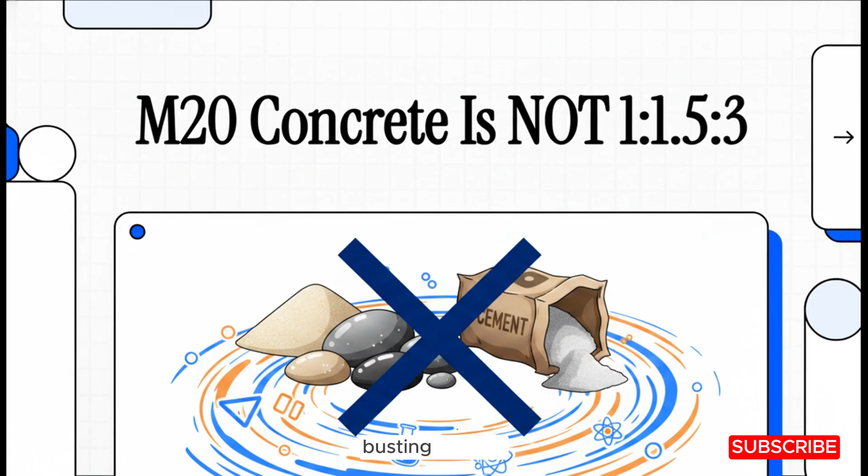Okay, if you've ever stepped foot on a construction site or even just watched a crew working from the sidewalk, you have almost certainly heard of the golden rule for M20 grade concrete. It goes like this: 1 part cement, 1.5 parts sand, 3 parts stone. Super simple, right? Well, you might want to brace yourself because everything you think you know about basic concrete mixing is about to get challenged. Today, we're completely busting the 1 to 1.5 to 3 myth. So, let's dive right into this.

There's this incredibly profound quote from M.S. Shetty. He's basically a legend in concrete technology, and he hits the nail on the head. He says, "It is easy to make concrete. Broken stone, sand, and cement make good concrete. But the same proportion of broken stone, sand, and cement also make bad concrete." It perfectly highlights this wild illusion we all have that concrete is just this foolproof, standardized recipe.

Which naturally leads us to a massive question. I mean, think about it. What exactly makes the difference between the good stuff and the bad stuff? If the physical, dry ingredients in the mixer are literally identical, why does the final product on one site last for a century, while another building crumbles into dust after just a decade? That's the core mystery we're unpacking right now.

And that brings us to Section 1, the myth of simple concrete. For decades, the entire construction industry has leaned heavily on these old-school rules of thumb. People just assumed that mixing by volume alone guaranteed a quality pour. But let's take a closer look at why that idea is fundamentally flawed.

Honestly, it's kind of like baking. These standard volume proportions, what engineers officially call nominal mixes, are basically like using a generic, store-bought box cake recipe. Sure, it'll work if you just want a basic everyday cupcake, but modern civil engineering, that requires molecular gastronomy. Simple volume batching completely ignores all the hidden chemical variables of the materials. It doesn't care about the moisture trapped deep inside the sand or the surface texture of the crushed stone.

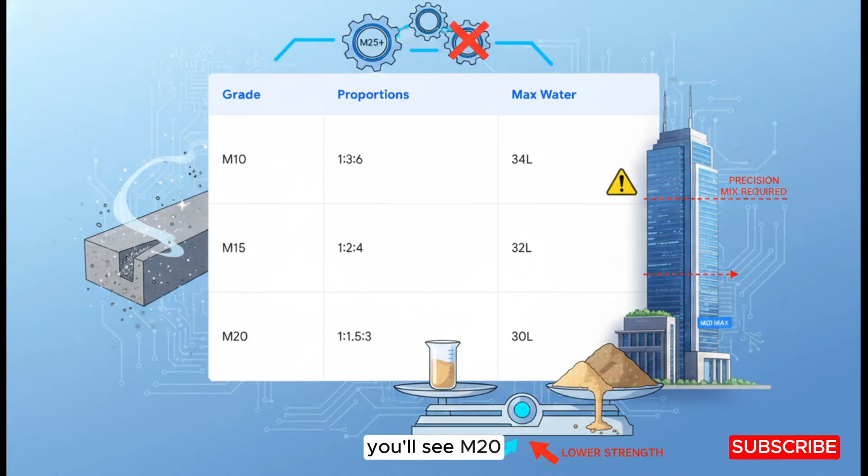Now, if you check out the Indian standard IS-456, it actually lists these nominal mixes. And right there at the bottom, you'll see M20 with its famous 1 to 1.5 to 3 ratio. But notice something absolutely crucial here. The engineering code strictly caps their use at M20 or lower. Why would they do that? Because these mixes simply lack the precision needed for high-strength structural concrete. They're essentially a relic of the past for anything that demands serious heavy-duty load-bearing capacity.

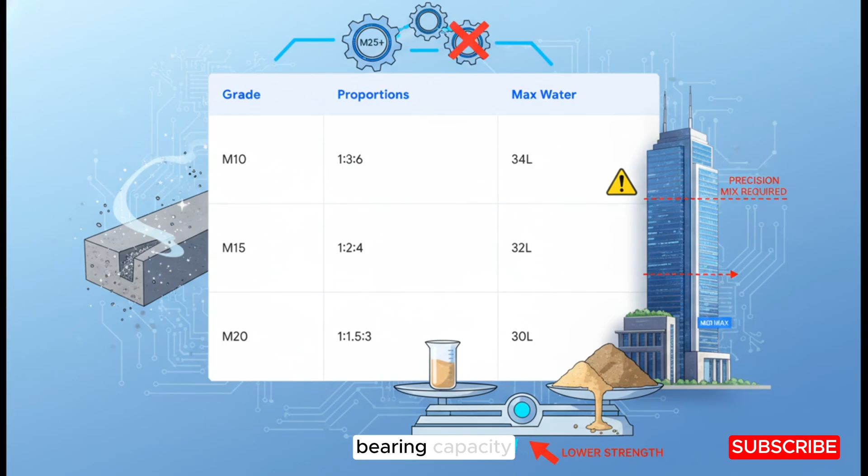Let's move into Section 2, Abrams' water/cement law. This is where we hit a massive paradigm shift in this explainer. We really need to stop obsessing over the dry proportions of sand and stone and start looking at the actual science of concrete. Because the reality, it revolves almost entirely around one critical liquid.

Enter Abrams' water/cement ratio law. This rule states that the strength of concrete is dependent only upon the water-to-cement ratio, as long as the mix remains workable. Proposed decades ago, this foundational law has stood the ultimate test of time. It is the single greatest truth in concrete technology. It is not the ratio of sand to stone that gives you strength. It's strictly the ratio of water to cement.

Now, what's really fascinating here is the data. Picture a steep cliff. As you move to the right on a chart and increase that water-to-cement ratio, the compressive strength absolutely plummets. There's no middle ground. Just a tiny splash of extra water causes a massive, immediate drop in structural integrity.

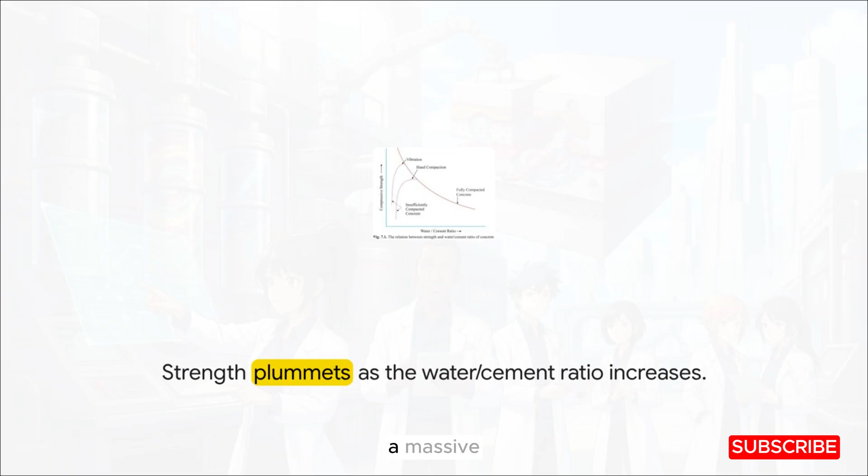And honestly, here is where the real-world drama happens. On a hot construction site, workers absolutely love adding extra water to the mixer. More water lubricates the whole batch, making it so much easier to pour, spread, and shovel. But internally, it's a disaster. As that extra water evaporates over time, it leaves behind microscopic capillary cavities. So the workers get an easier pour today, but they are completely unknowingly sabotaging the concrete's ultimate strength for decades to come.

Now, while Abrams' law is the bedrock, modern concrete science recognizes that strength is actually a really complex, multi-layered equation. It's influenced by the grading and surface texture of the particles, the maximum size of the aggregate, and crucially, achieving 100% compaction to squeeze out all those hidden air voids. As you can see, it is vastly more complex than just a static 1 to 1.5 to 3 bucket ratio.

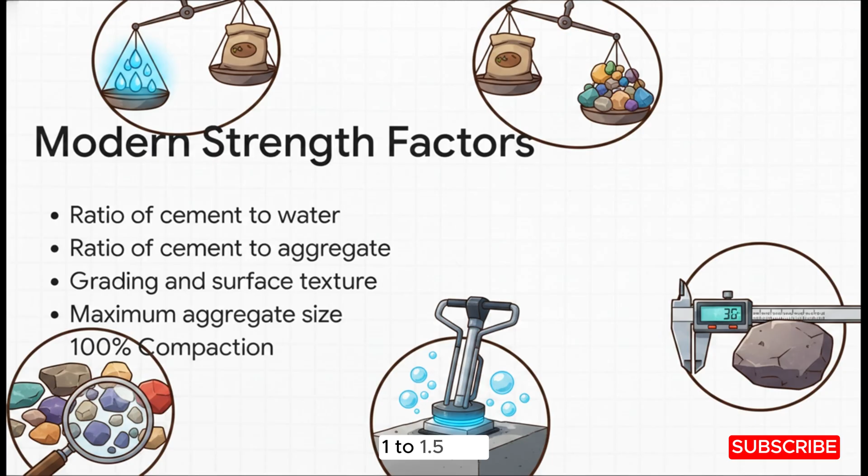Let's shift gears into Section 3, nominal versus design mix. So how do modern engineers solve this extreme variability problem on big, multi-million-dollar projects? By tossing those old nominal mixes entirely out the window and upgrading to heavily engineered design mixes. Let's contrast these two side by side. The nominal mix relies on fixed proportions.

It's way less precise, and it completely ignores whether your aggregate is soaking wet from a rainstorm or bone dry. The design mix, on the other hand, is a highly calibrated scientific process. It's engineered from scratch for a specific target strength, it meticulously accounts for material variability, and it strictly locks in that water-to-cement ratio.

For instance, when an engineer says M20, that 20 isn't just a loose suggestion. It literally means a characteristic compressive strength of exactly 20 newtons per square millimeter at 28 days. Hitting that exact metric consistently across a massive infrastructure project, that requires deliberate scientific design. You can't just blindly trust a bucket ratio and cross your fingers.

And to achieve that exact precision today, the industry uses incredibly advanced batching plants. We're talking massive scale and serious technology here. Modern construction relies on advanced weight batching and highly sensitive moisture sensors to execute a design mix flawlessly. It's a far cry from just throwing buckets of sand together on the dirt.

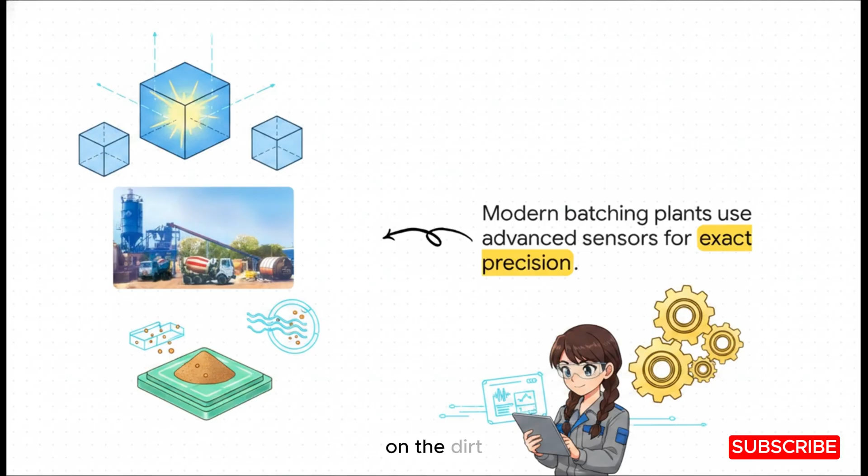Which brings us to Section 4, the durability crisis. Now, this is where the plot really thickens, because engineers recently discovered a terrifying reality. Achieving that target 28-day strength is no longer enough to guarantee a safe, lasting building. Think about this for a second. We've all seen the tragic news stories of bridges or high-rises crumbling decades before they should. If those structures passed their strength tests on day 28, why didn't they survive the test of time?

The dark answer lies in a vicious, unstoppable cycle. Remember that extra water we talked about? It leads to high permeability. The concrete becomes like a hard sponge. That porous concrete absorbs environmental chemicals, leading to internal volume changes. Those changes cause microcracks, and those cracks invite in even more water and aggressive salts from the environment. Ultimately, it leads to total disintegration. You can have incredibly strong concrete on paper, but if it's highly permeable, the environment will literally eat it alive.

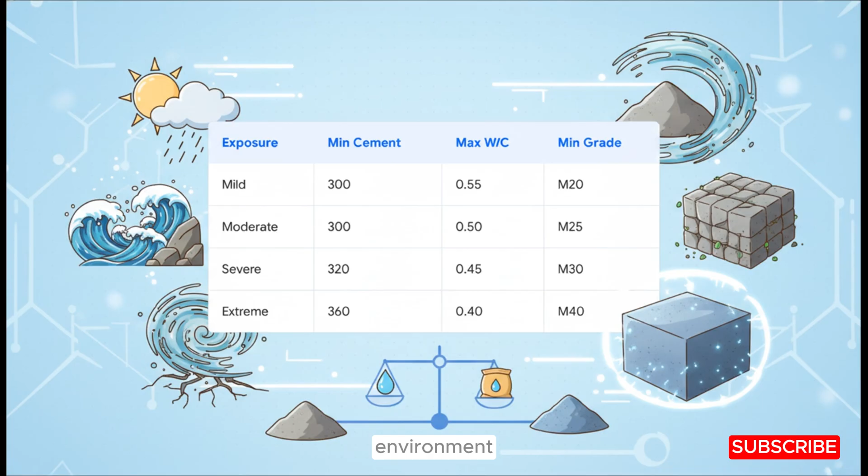The crucial proof of this is right inside the IS 456 code. Just look at how environmental harshness strictly dictates the chemistry. If you want to survive an extreme environment, you're legally required to drop your water-cement ratio all the way down to a maximum of 0.40 and heavily increase your cement content. The harshness of the environment dictates your mix, not a standardized textbook ratio.

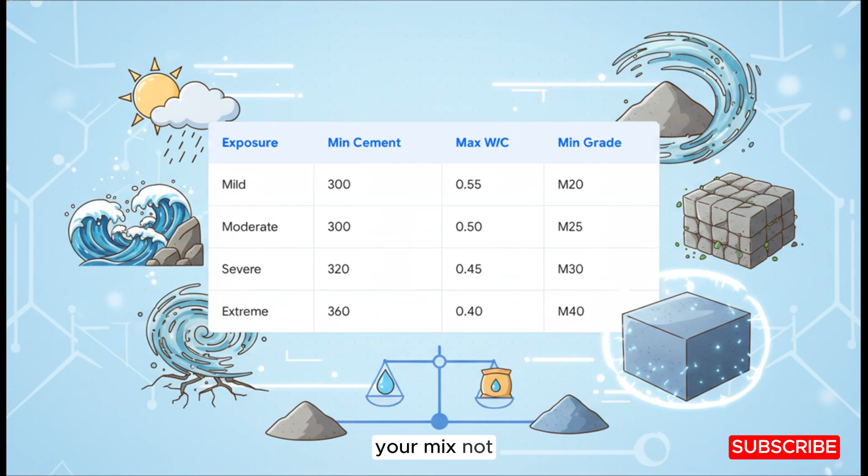Moving into our final segment, Section 5, Designing High-Performance Concrete. Now that we know the massive stakes surrounding durability and permeability, let's look at exactly how a true design mix translates into a practical, real-world workflow to survive these harsh environments. Whether you use the Indian code or the British DOE method, the steps are strictly sequential.

Step 1, determine a target mean strength. Step 2, select a strict water-to-cement ratio based on those durability needs we just talked about. Step 3, determine your total water content. Only then, down at Step 4, do you finally calculate the aggregates. The sand and stone are literally the very last things you figure out in the math.

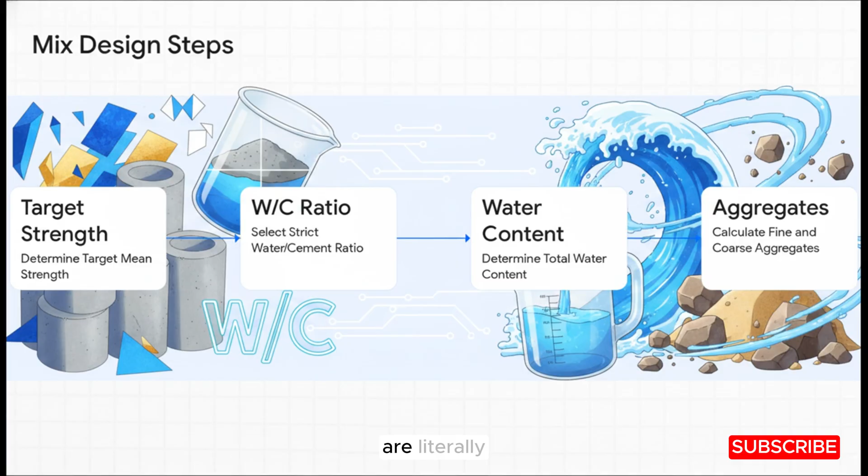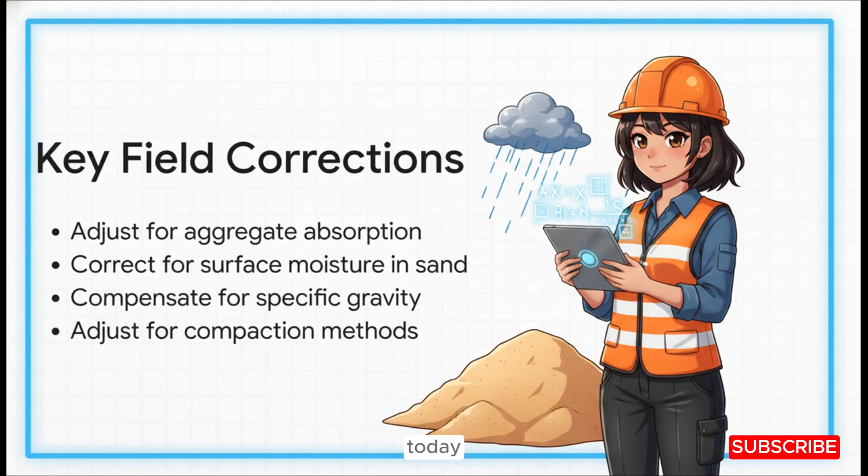But wait, reality strikes again. Because even after all that complex lab math, a perfect design must be constantly adjusted on-site before a single drop is poured. You literally have to correct for the aggregate's water absorption, adjust for the free surface moisture already sitting in your sand pile, and compensate for specific gravity differences. Think about it. If it poured rain last night, your sand is soaking wet. If you stubbornly stick to a 1 to 1.5 to 3 ratio today, your mix is entirely ruined before you even turn the machine on.

We honestly take this machinery for granted. We pass them every single day on the street. But this humble mixer isn't just stirring wet dirt. When it's operated correctly, guided by a scientific design mix, it is executing a highly calibrated chemical formula. It's basically an active site of molecular engineering that is quite literally keeping our modern world standing up straight.

So what is the ultimate takeaway we need to walk away with from this explainer today? It's that true concrete engineering designs for the harshness of the environment over its entire lifespan. It's not just about hitting a basic strength target on day 28 so everyone can go home. Long-term durability, low permeability, and highly exact water ratios, those are the true markers of quality concrete. The 1 to 1.5 to 3 rule, yeah, consider that myth officially busted.

I'm going to leave you with this final, provocative thought. The next time you're walking past a busy construction site and you hear that concrete mixer spinning, what are you going to see? A simple, dumb recipe of sand, stone, and water? Or will you see a carefully engineered chemical reaction taking place right before your eyes?